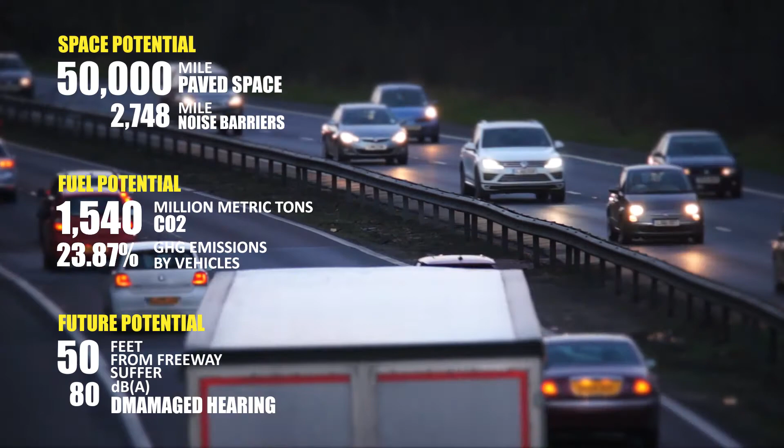Unfortunately, these impacts disproportionately harm lower socioeconomic populations, who are more likely to be located near high-frequency roads. While these problems are not new, they represent ongoing injustices within the structure of our cities and represent a lack of urgency for integrated abatement.

By studying symbiotic species relationships as a means of intervention, our project aims to create an approachable solution to immediately mitigate these injustices and to begin to generate new visual representations for imagining the future of our built environments.

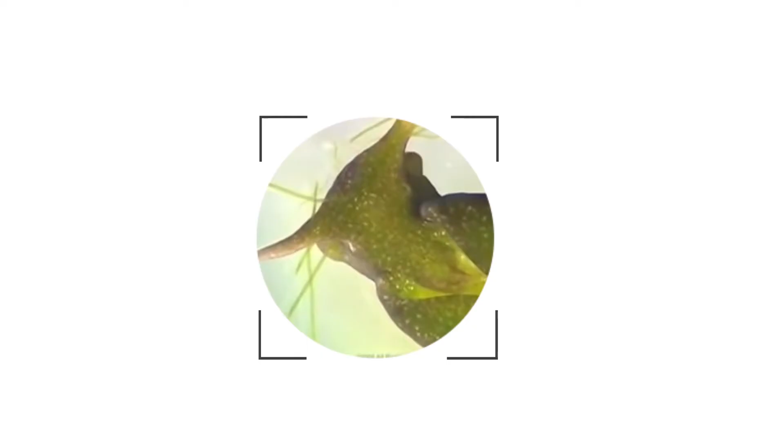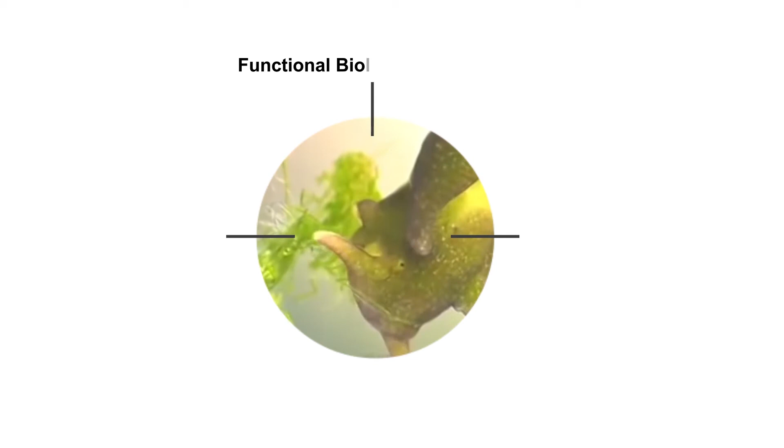The project began by researching the existing symbiotic relationship between the Elysia chlorotica species of sea slug and the Vaucheria litorea species of algae. Analysis to understand the success of the species relationship included the biological systems, the functional processes, and the conceptual relationship.

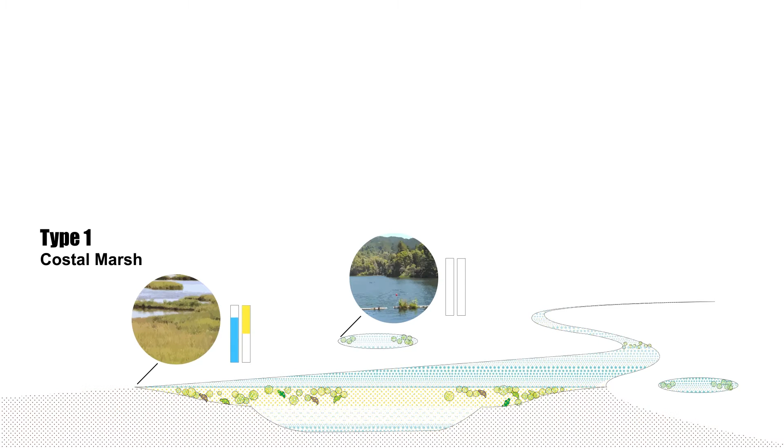The research into the species environment identified shallow water ecosystems of coastal regions as the basis for study. This included a variety of salinity ranges from salt marshes to inland freshwater sources. The key factor of all these environments is access to sunlight, carbon dioxide, and additional nutrients for algae photosynthesis.

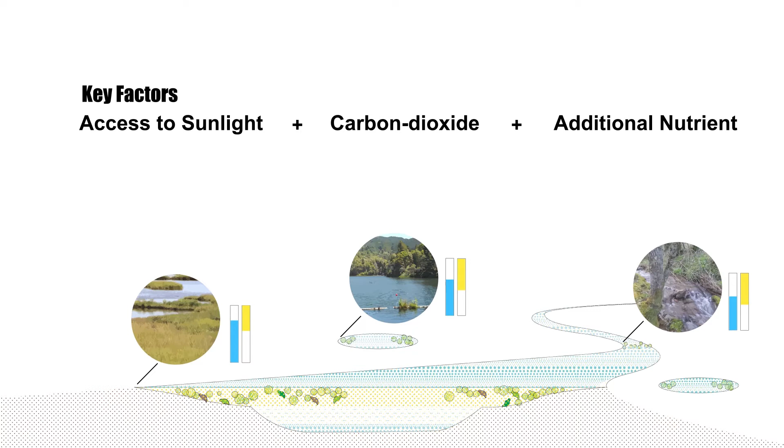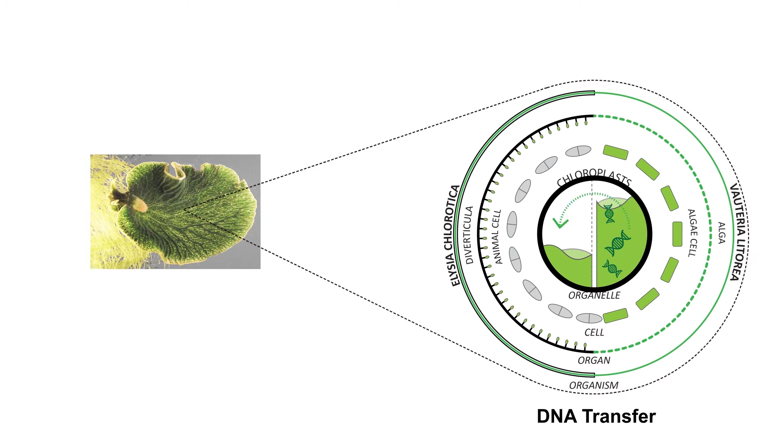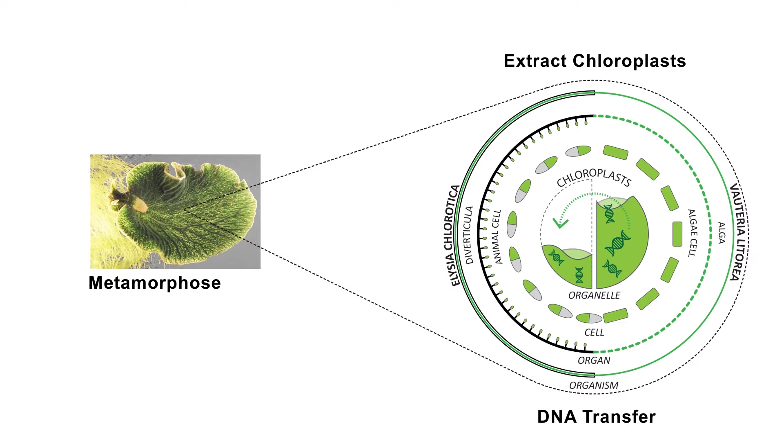Situated in these environments, the slug can access and extract algae DNA to incorporate into its own DNA structure via horizontal DNA transfer. This allows the slug to also extract and store algae chloroplasts within its diverticula, triggering metamorphosis. The sea slug is a chimera, able to integrate species from both Animalia and Plantae kingdoms for mutual benefit.

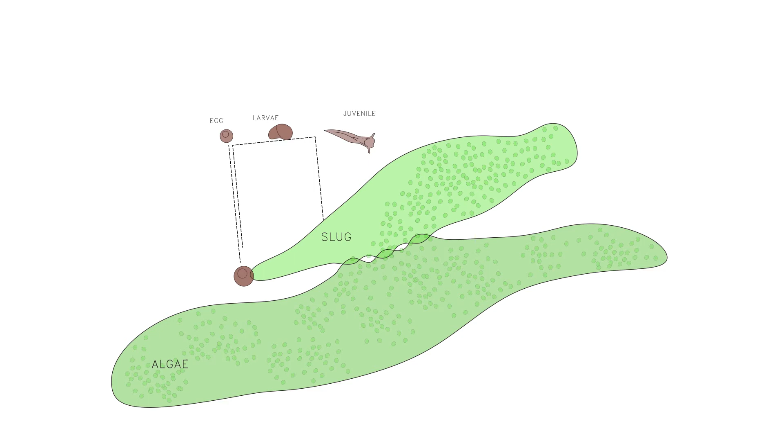The animal, the sea slug, benefits by taking on the characteristics of the plant, becoming plant-like both in form and in function, allowing the slug to be photosynthetic to produce its own fuel. The plant, algae, benefits by evolving to survive within the Animalia kingdom.

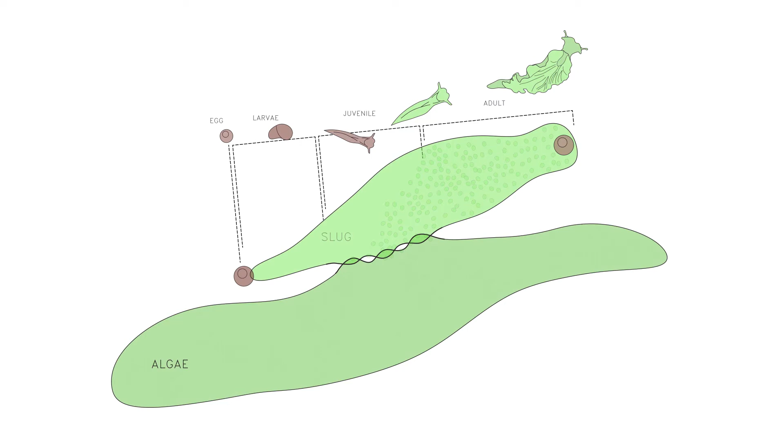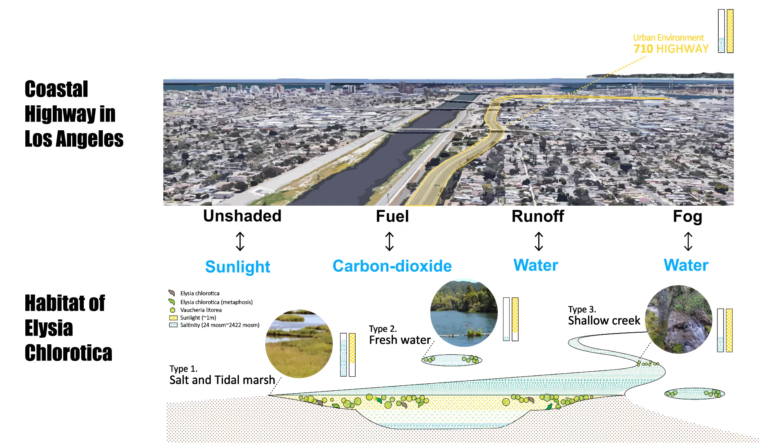The highway, as a design context, demonstrates interesting parallels to the environment of our symbiont species due to the correlation between the systems. These linear open spaces are abundant with sunlight, carbon dioxide emissions, and potential water runoff. Could the highway system become chimeric and act like the slug by promoting the growth of other species within its bounds? Through collaboration over time, could it create a more ideal environment by serving greater functions, including pollution filtration, noise reduction, fuel generation, and ultimately address socioeconomic inequities?

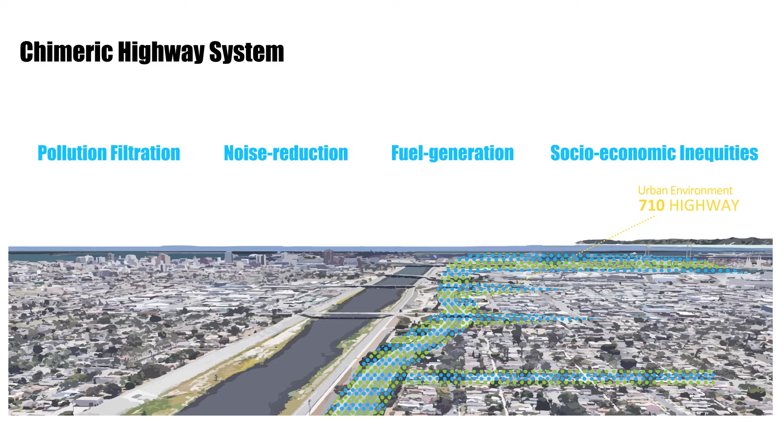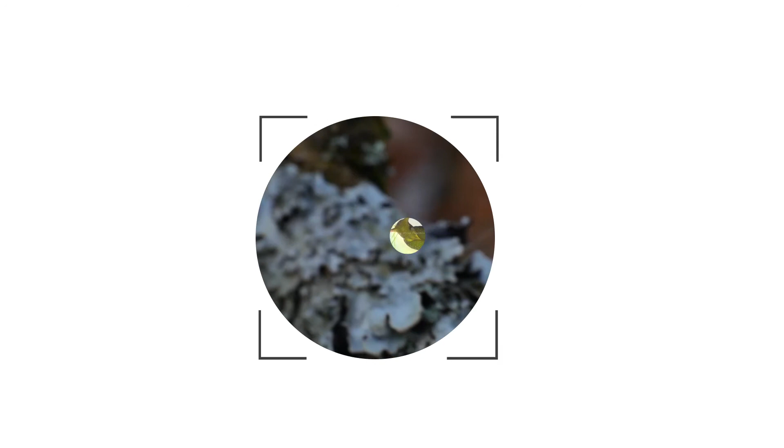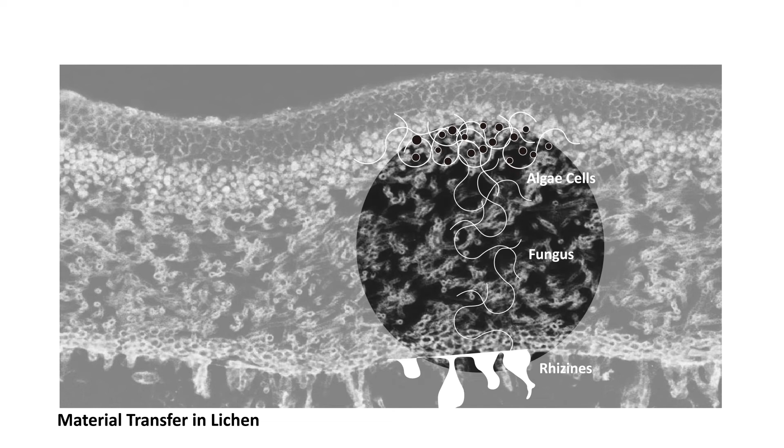In our search to find a parallel symbiont species with non-aquatic applications suitable for the highway context, our project identified lichens. Where the sea slug becomes both animal and plant, lichens incorporate algae to become both fungi and plant. Lichens are resistant to desiccation, with water presence activating photosynthesis. Lichen varieties range in terms of resilience to pollution, making them indicators for health and success of the overall system.

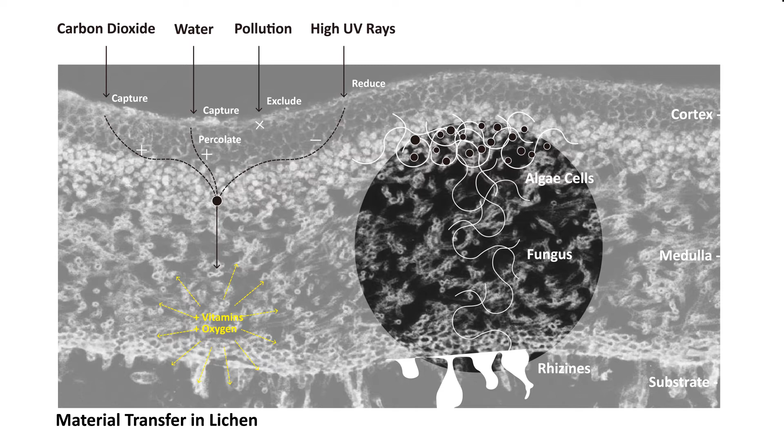Based on our research, we began earlier variations for algae-based models, including algae tiles, fognet systems, and storage systems. However, each of these systems were too narrowly focused, required intensive engineering, ignored important socioeconomic conditions, and depended on water sources incompatible with the highway system.

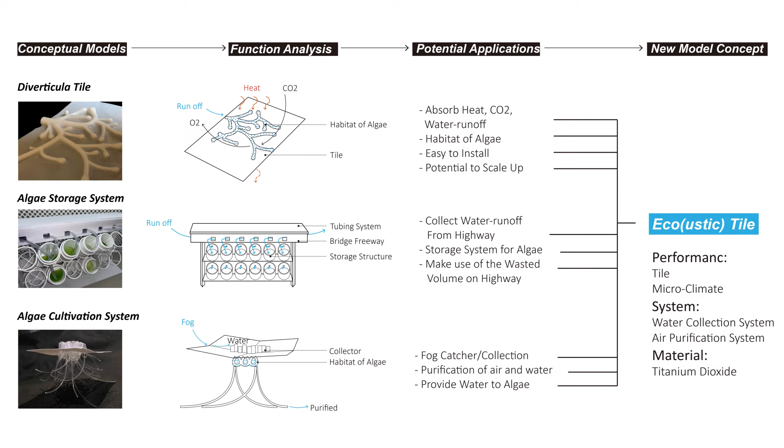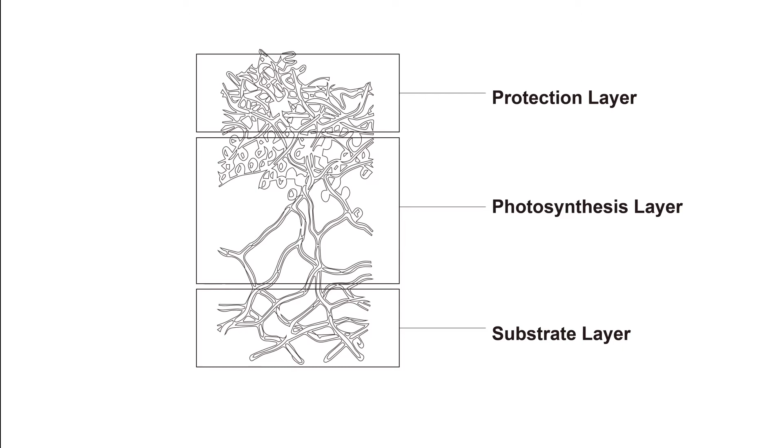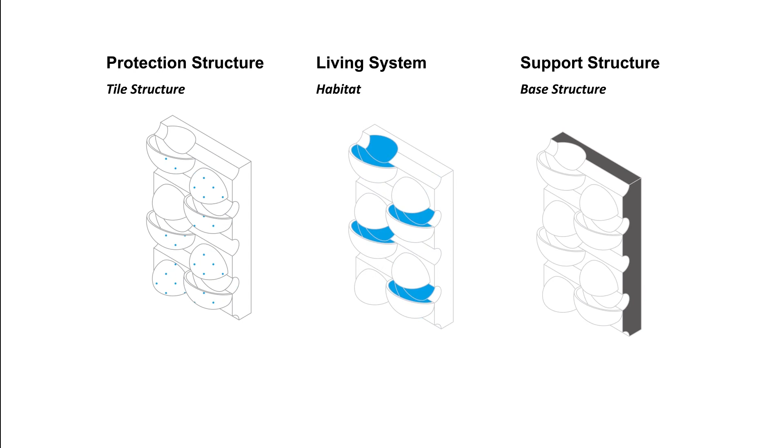Our intervention utilizes the same components as the lichen systems. The layers of environmental protection, photosynthetic growth, and structural support are translated into our proposed project, the Ecoustic tile. These components become the protection structure, living system, and support structure of our living prototype. The integrated approach provides a nourishing habitat for symbiont species within the context of the freeway infrastructure, resulting in the overall well-being of adjacent communities.

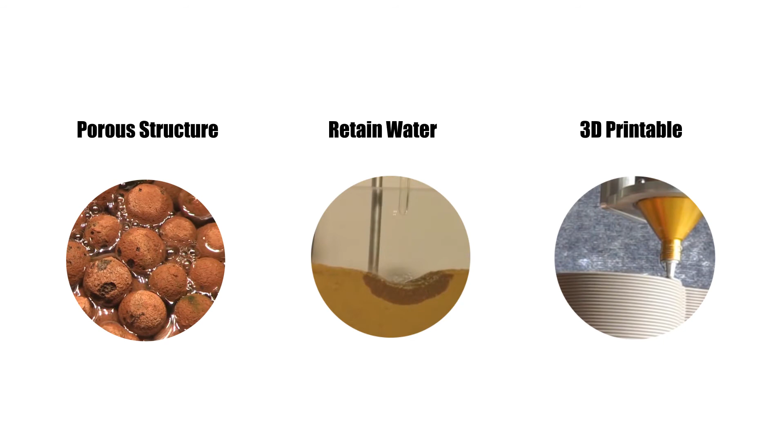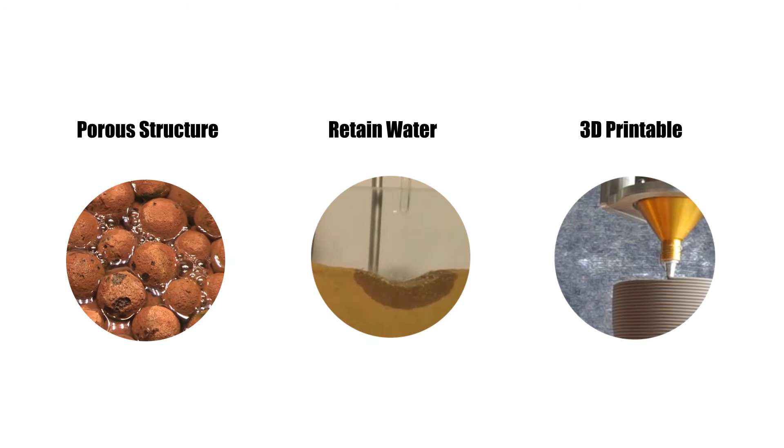The base material of the tile is clay, selected for its natural, sustainable, and accessible qualities. Clay's microporous structure retains water and exhibits pollution filtration characteristics. It can be 3D printed or handcrafted, allowing for the code or model to be open sourced. The tile form encompasses various elements, while the overall wall meets U.S. transportation requirements to be non-distracting.

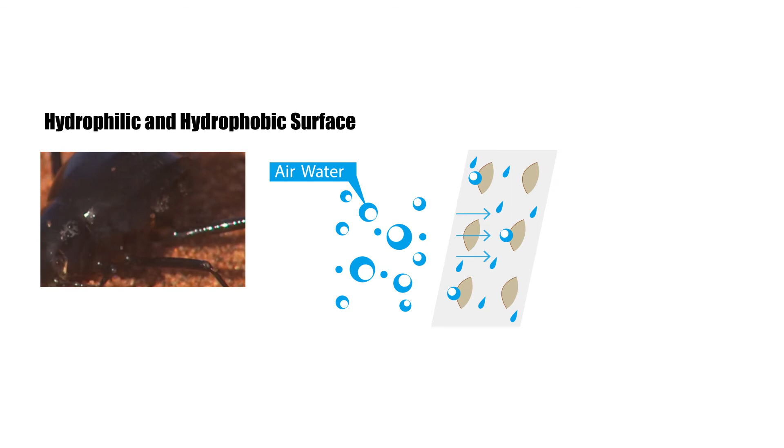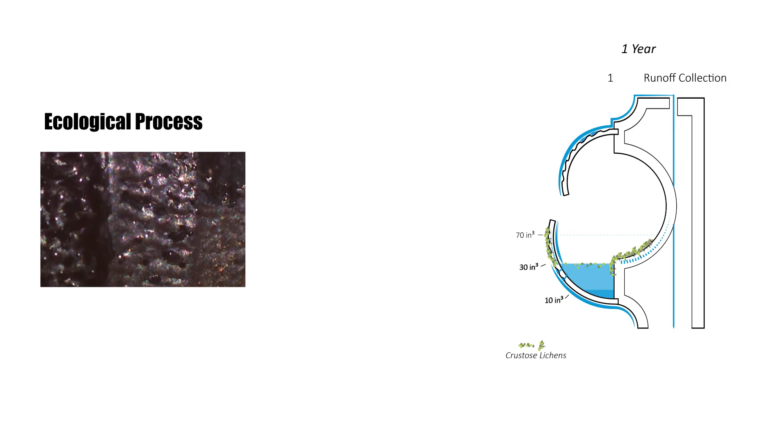Primarily, the form mimics the surface structure treatment of the Namib desert beetle, seen in the tile's grooves and spherical shapes acting as hydrophilic and hydrophobic surfaces that strategically move water. These formal attributes create variation for shade and sun exposure, producing a range of conditions for fungal and plant growth. Smaller scale grooving resulting from tooling marks on 3D printed tiles or natural variation on handmade tiles create micropockets which attract water and variegated surfaces to encourage root adherence.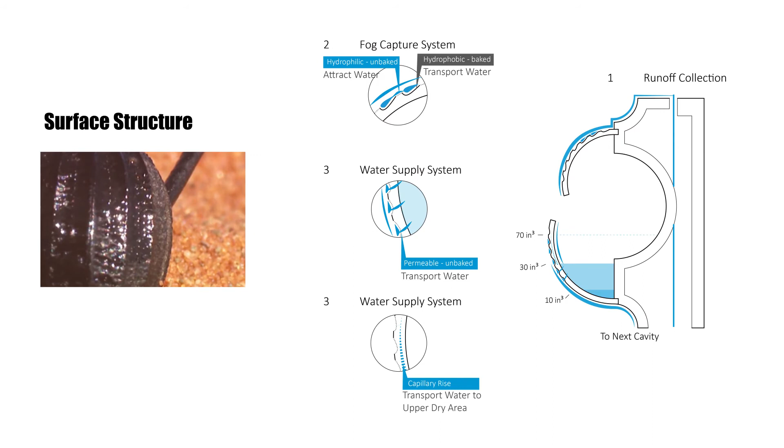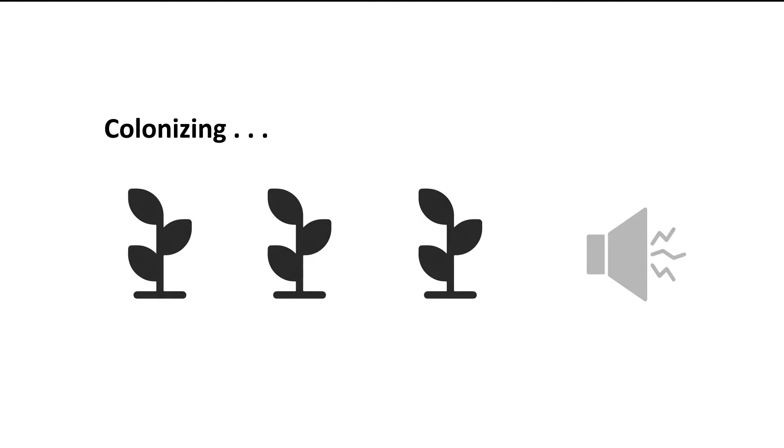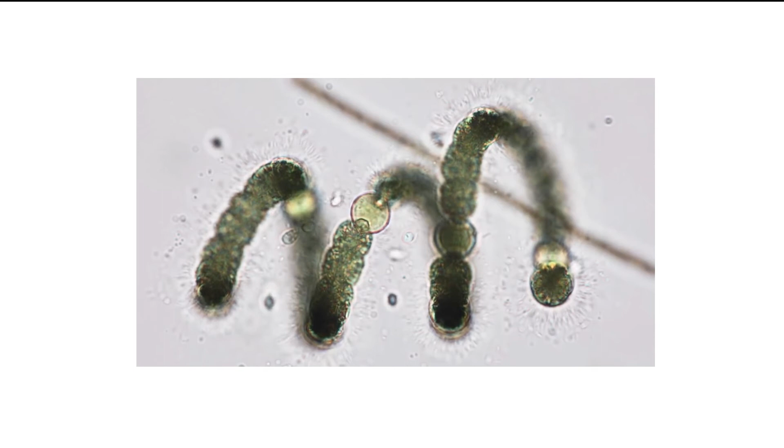The living components colonize the tile in stages, altering the microclimate of the vertical surface, sequestering pollution, and creating acoustic absorption over time. Algae plays an important role in the initial mitigation of pollutants, including sequestering carbon dioxide. This also involves blue-green algae, a nitrogen-fixing cyanobacteria, which additionally provides algae sources for lichen structures.

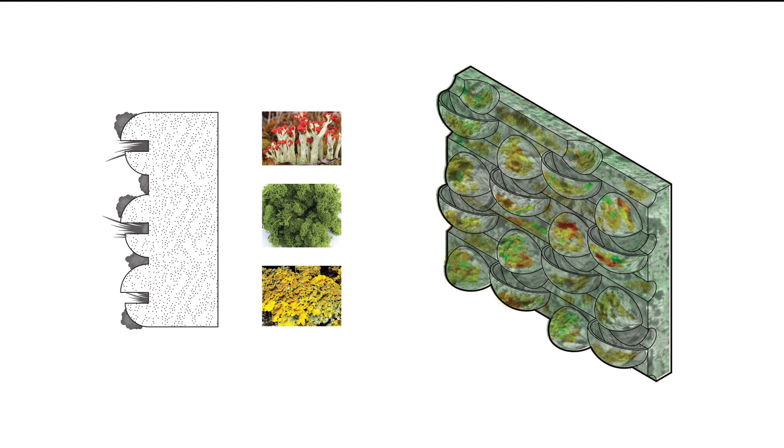Crustose lichen, the most pollutant-resistant lichen species, would colonize the tile and alter the microecology. Then, lichen varieties of fruticose and foliose could become established, providing additional pollution mitigation and enhancing the tile performance. As biomass accumulates, it would perform as an acoustic barrier for high-frequency sounds. Lower-frequency noise would be absorbed by a small air cavity at the back of the tile, following the Helmholtz resonance principle.

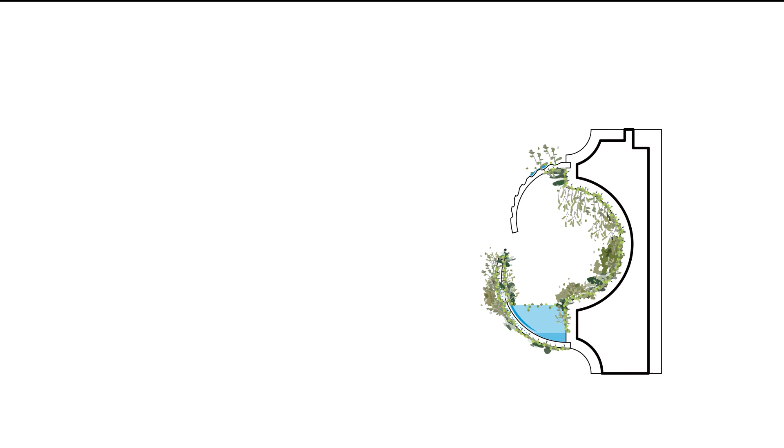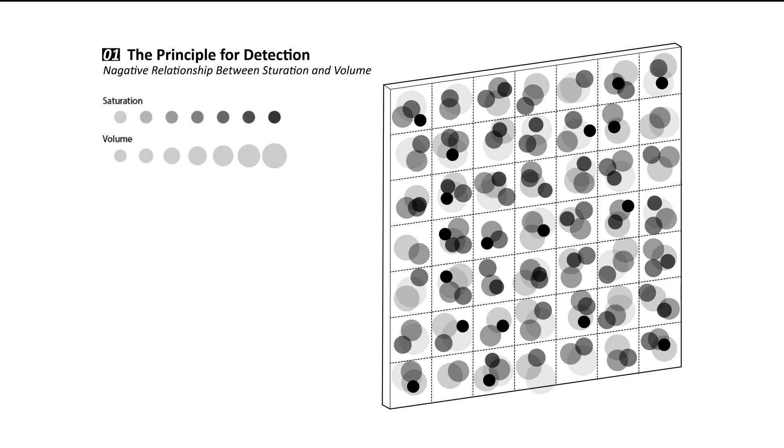The utilization of the low-cost hyperspectral sensors embedded within each tile integrates technology into the living system to better monitor the health of both the individual tile as well as the overall system. The data would determine whether the tile remains on the freeway, is to be harvested for its acoustic or biofuel properties, or requires replacement from damage.

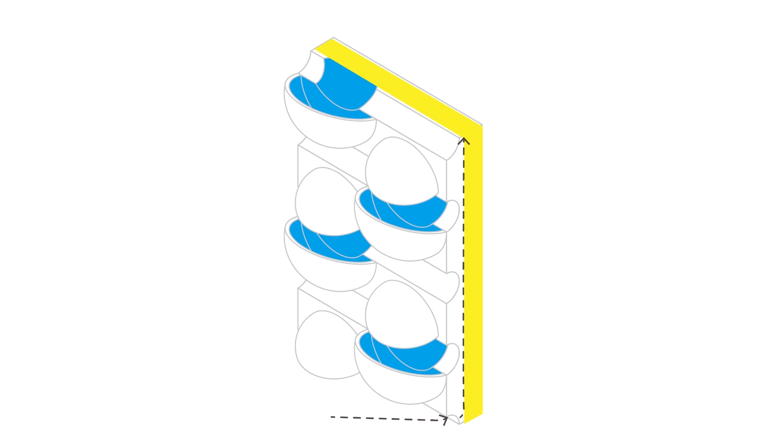The project was designed as a low-impact passive system, creating a variety of spaces for water retention and sunlight variation. However, for more difficult living conditions, future modules are being studied, including methods to collect and store water runoff within the cavity of the tile.

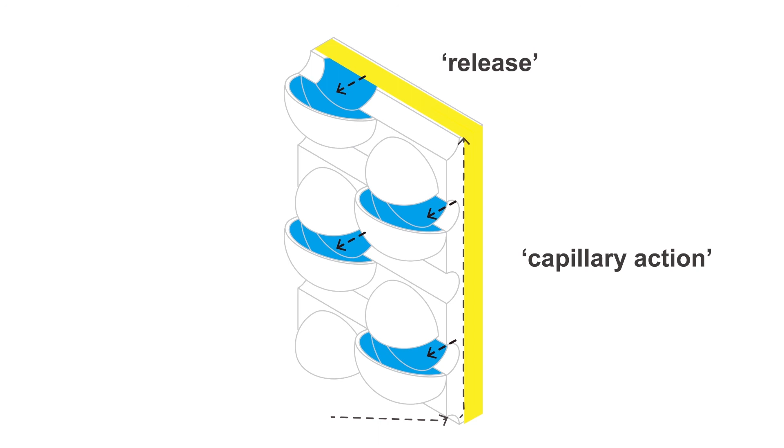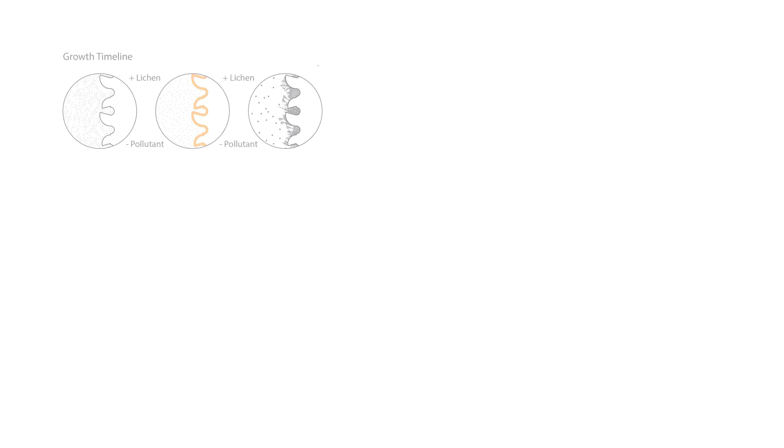Acoustic tile asserts the need for biological thinking by welcoming natural systems within our man-made infrastructural networks. It asks whether these systems can coexist and collaborate towards healthier and more equitable futures. On a practical level, the project aims to be a low-cost and easy-to-implement system to provide relief for environmental and noise pollution. Yet it also confronts the socioeconomic inequities constructed within our urban fabric. We are not naive to suggest this project is a solution to these injustices.

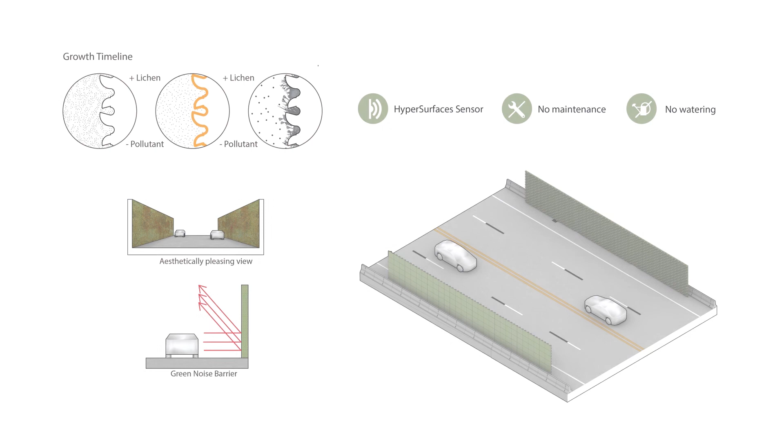Rather, it begins the active process of healing by providing a method for interventions to occur at a government or grassroots level. The expanses of living walls alongside the very veins associated with progress bring awareness to a different potential where biological and technological systems are not set in opposition, but can coexist for mutual benefit. Even in a future scenario of improved technologies and reduced dependence on cars, the system creates a lasting mutuality between our infrastructure, our biophysical world, and our most vulnerable communities.